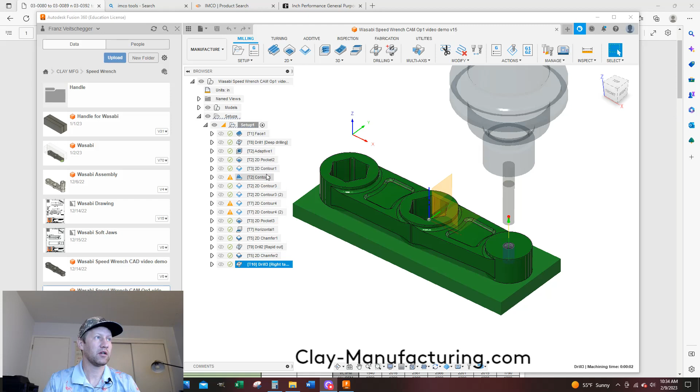I'm going to right click and say edit. When I'm looking at my feeds and speeds with an end mill, I'm looking at the feed per tooth, also the IPT, inch per tooth. So this is about 3.3 thou, a little over 3 thou. So I'm paying close attention to that.

I want to show you something else. I'm going to come to my select, and I have my Clay mini mill aluminum. If we do my T... did I say T3? It's my T2 on here, so it's my T2, it's my 3/8. When I click on it, I have a product link right here, and I'm just going to click on here and follow that link.

No, I don't work for Haas. This is just the tooling I'm using. So this brings me to the exact end mill that I'm using, and Haas has really good speeds and feeds charts. So I'm going to click right here.

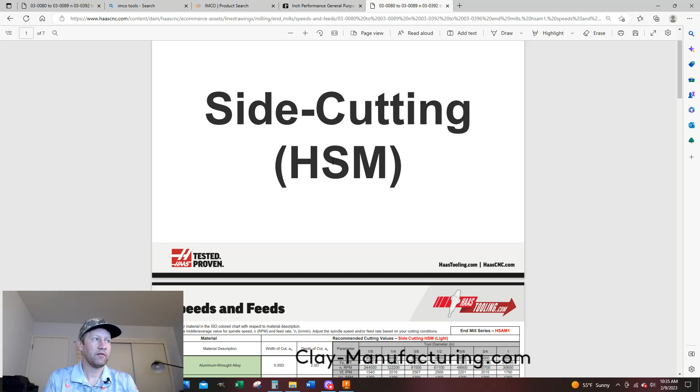This side cutting HSM is kind of a newer strategy where it's small step overs, really fast linear feed rate, and relatively long depth of cut. So let's break it down.

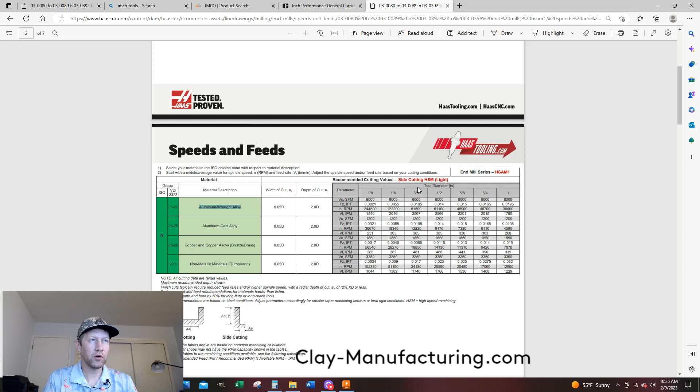We're going to pretend we're using aluminum wrought alloy, and we're using our 3/8 end mill. Let me zoom in a little bit. So the inch per tooth, that feed per tooth, that's what I'm looking at right here, and this is relatively high. Again, this is a small width of cut or step over, or optimal load as Fusion calls it, with a really high feed rate.

Haas also puts in a recommended RPM. So if you're using an SFM, your surface feet, the machinability of the material, of 8,000, it's saying your inch per tooth can be 10 thou, but your RPM needs to be 81,000. I don't know about you, but I don't have an 81K spindle. So when a situation like this arises, you max out your RPM.

So on mine it's 6K, so I'd max out my RPM, and then I'd try to adjust my linear feed rate to accomplish this 10.5 thou inch per tooth. Now there's some things we need to really pay attention to. We have to pay attention to our width of cut. And if you go down here, there's a little diagram.

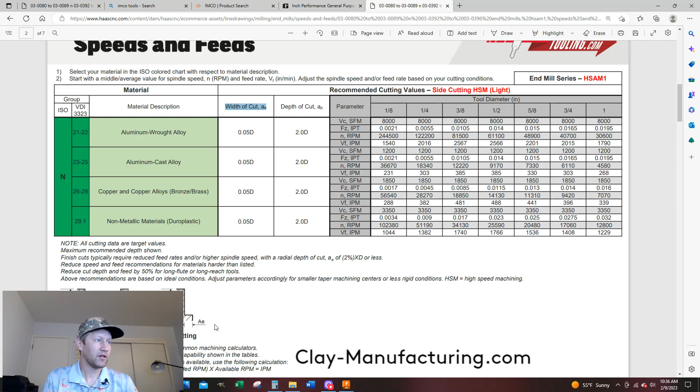So side cutting, this is the AE, and it gives you a little conversion, or a little formula. So if you're using these feeds and speeds, this side cutting HSM, you need to use these parameters. So let's pop out my calculator. I did some math.

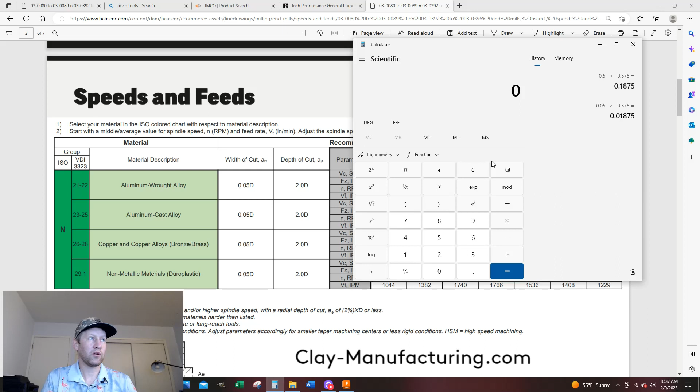If we're doing a 3/8 end mill, we're going to do 0.05 times the diameter for their recommended width of cut. So this is 0.05 times 0.375, enter. So that's a small step over. So the max step over, if you're using the feed and everything that pertains to this, is about 19 thou of your step over.

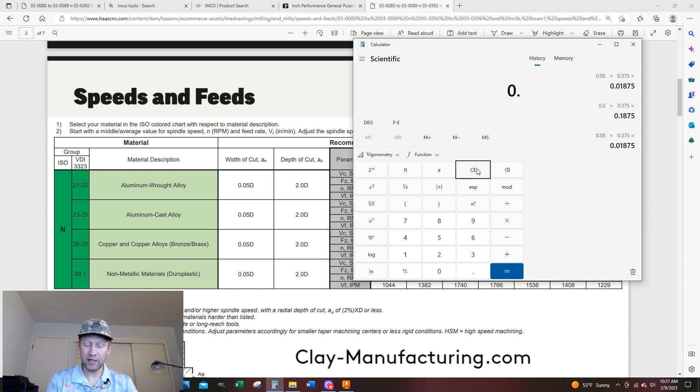And you do not want to exceed a depth of cut. So that's your AP. If you look on the lower left right there, you don't want to go more than 2 times the diameter. So if I clear this out, my diameter again is 0.375 times 2. So it means with these feeds and speeds, the maximum depth of cut I can do is 3/4 of an inch. So that's a pretty good step down.

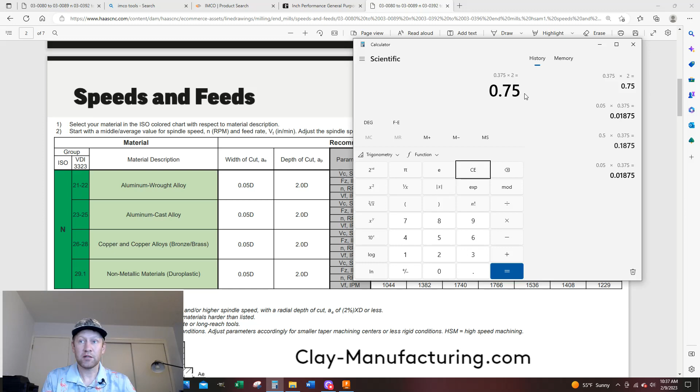That's the max. Now, on this one, this is incredibly fast, and I found on my mini mill that it doesn't work that well for me. I'm not willing to run my machine fast enough. Also, this strategy, you have to do tons and tons of step overs to machine something. So I've actually been increasing my width of cut a little bit on my machine.

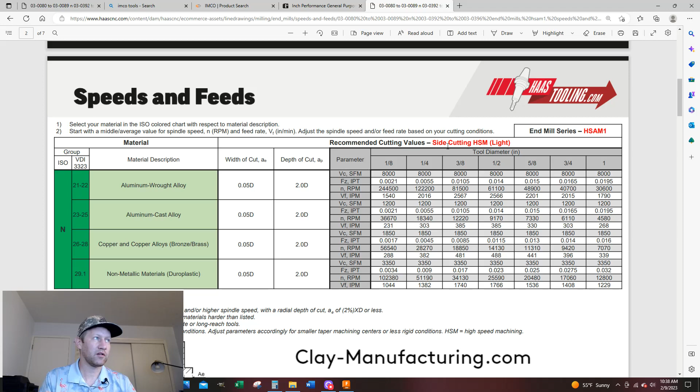And then before I hop on over to another website where I go to Guhring a lot. Guhring is a good website for feeds and speeds as well. But let's cruise down this one. So on these speeds and feeds, we have a more traditional side cutting.

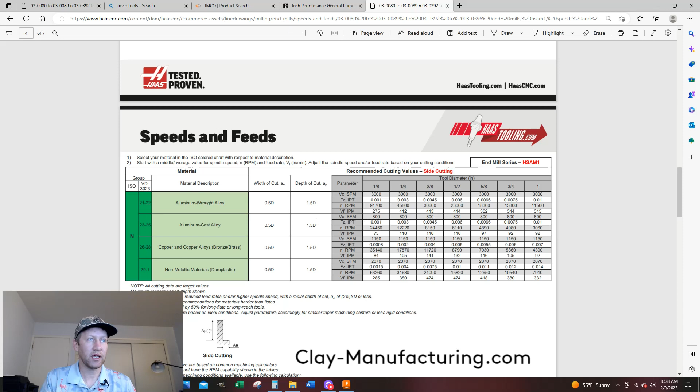And so here, if I'm looking at the same tool diameter, the 3/8, you see how the chip load is drastically reduced. It's 4.5 thou. So on the other one, it was 0.010. This is 0.0045. And that is because if you look at the width of cut, the width of cut has increased a lot.

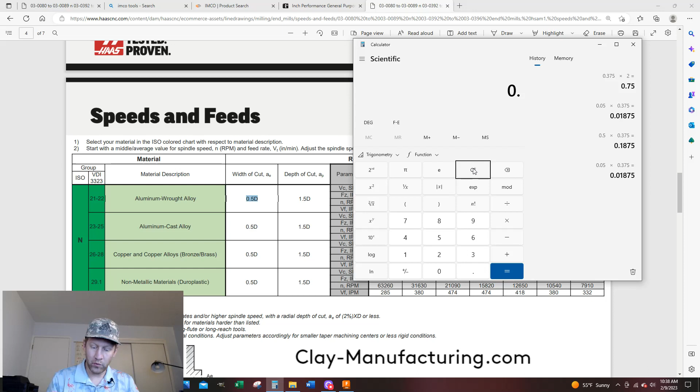So it's 0.5 times 0.375, that's the cutting tool diameter, and I'm going to say enter. So the width of cut is 0.1875. So that's how much it steps over in between steps. So you have a lot more engagement on the side of the tool.

And if you notice, the depth of cut maximum decreases as well. So that's 1.5 times 0.375, enter. So the max with these settings, with this chip load, is a little more than 1/2 of an inch, where that other one was 3/4.

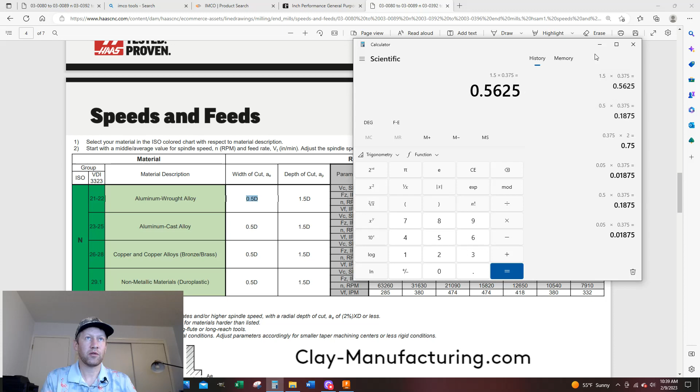And let's see, and then you see right here, it's still saying the RPM is 30K, which most of us don't have a 30K spindle. So on mine, I would max it out at 6,000 and start adjusting my linear feed rate to get here. However, my machine's not that rigid compared to like a bigger 8,000 plus pound machine. My machine's about 4,000 pounds. It's like just barely an industrial grade machine. And in fact, most people just laugh that it's a Haas, but for the money, it's awesome.

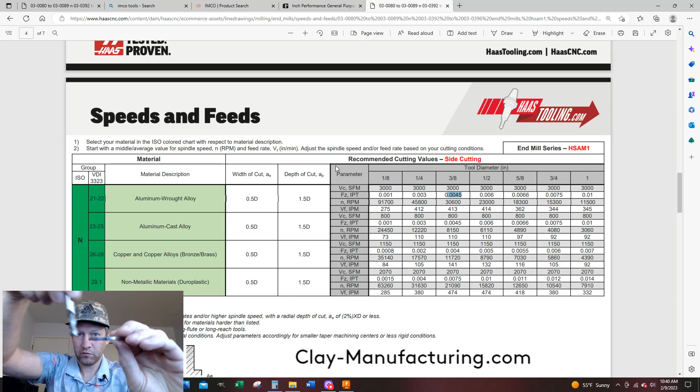So where do I go from here? So this is for side cutting. When you're using the end mill and you're cutting on the side, let's see, when you're cutting on the side of a part like so.

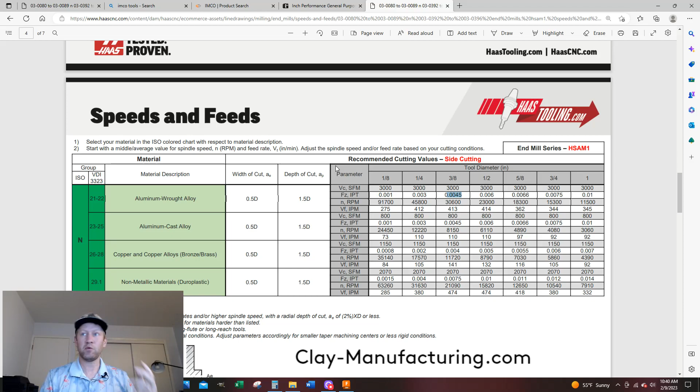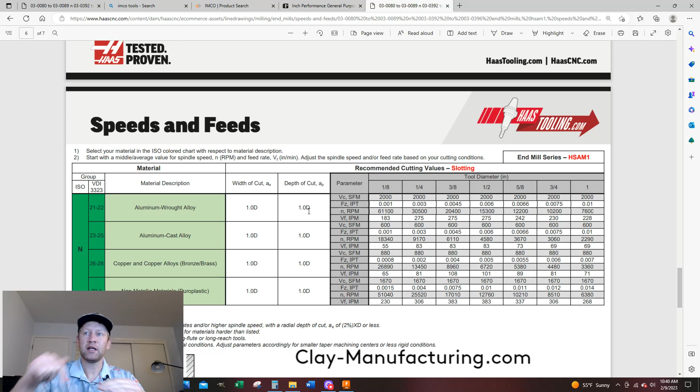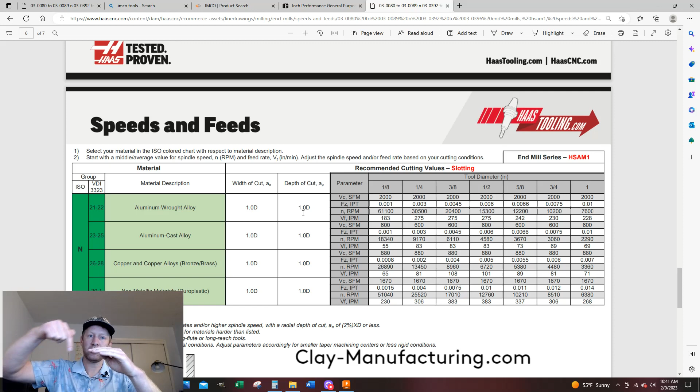And then the maximum depth you want to do, recommended, is between each pass, 1 times the diameter. So in this case, it'd be 1 times 0.375, so that's 0.375. If you were doing a slot deeper than that, you'd have to go 0.375 deep and then continue until you get to your nominal value.

And then let's go over to Guhring. So this is Guhring's website. I really love their feeds and speeds, I probably use this one the most. And when I'm doing feeds and speeds, I'm bouncing between websites kind of seeing, because you're going to have to machine, you're going to have to start somewhere.

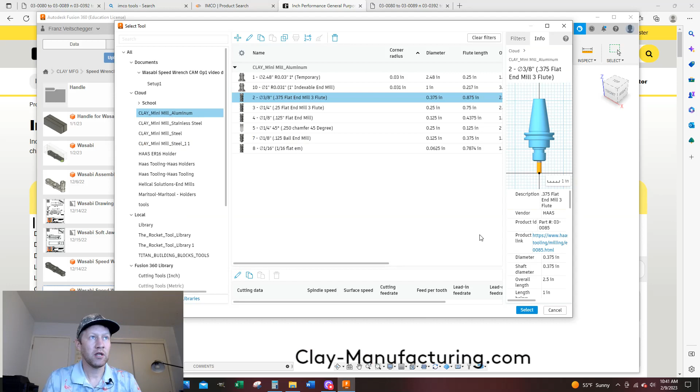Let's see, Fusion, I'm going to say cancel. A lot of times, if you're starting with your feed per tooth about 1 thou, that's really low. You probably don't want to go much lower than that, but it's really safe for a lot of machines.

And in aluminum, most of the time, when you're side cutting, not drilling, side cutting with like an end mill, I'll max out my RPM and then just adjust my linear feed rate here to get my feed per tooth. So they affect each other. And so I'll do it right now.

So if I drop this down, if I go cutting feed rate, let's go to 10 inches a minute, you see how it drastically reduces it. Now it's a half thou, and if I increase this to 100 inches a minute, you see now it's at 5 thou, and if I decrease my RPM, it's going to load that tool up more.

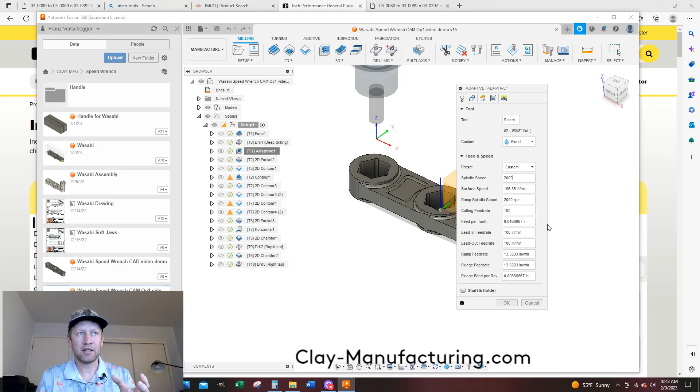So if I go from 6,000 RPM to 2,000 RPM, look at that, now I'm really loading it up. So it's generally safer in aluminum to have a higher RPM versus, you typically max out, you have a high RPM, so that way if your feed's not spot on, you're not loading the tool or the machine up as much, or if you get your offsets wrong.

I usually see people when they're using a wobbler, they get their offset wrong by 100. They either add or subtract 100 thou in the wrong direction or forget altogether. So they're plowing that tool through material, and that's where I see a lot of problems. So when you have that RPM up and it's taking a bigger cut than you think, it's safer on the machine versus if you had a lower RPM.

And that's aluminum, you get away with murder in aluminum. It's like glorified wood. So when you're doing your steels or harder material, you need to be pretty spot on with your feeds and speeds.

Now I'm back on the Guhring website. We're still talking about how I find my feeds and speeds. Guhring's awesome, it breaks it down, it really simplifies it. It doesn't just show me the color, it gives me a description of the item.

So I want aluminum, and then we'll kind of work our way to my tool that I have. I want my diameter in fractions, so I'm going to click on here. And this tool we're doing is 3/8. So yeah, I'm going to go update results.

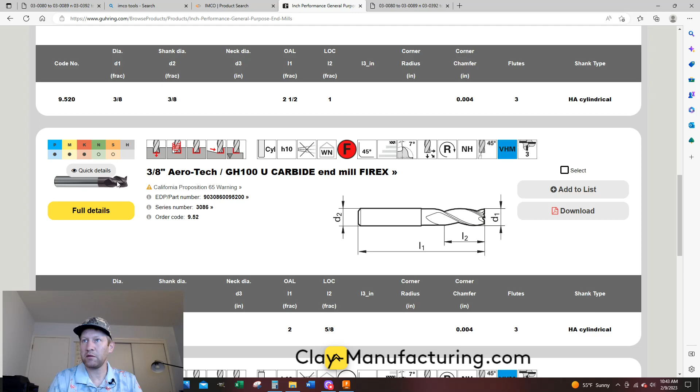And let's see, so this, I know mine's, see, these have a coating on them. The one in my example does not. So we're right here, 3/8.

This, my flute length right here, this is l2. It's saying 1 inch. So if I look down, this is my length of cut or flute length, that's 1 inch. And my overall length right here, I think that's an l1, yeah, that's the overall length, 2.5 inches. And my shank diameter, all right, everything looks good.

And this is a 3 flute. So that's really close to the tool. It's a carbide tool, so it's really close. So we're just going to look at it.

We're going to go to full details, and we're going to do some compare and contrast. And I'm going to come, and then it shows you everything this end mill's capable of, and this is the same as the one I just showed you in my hand.

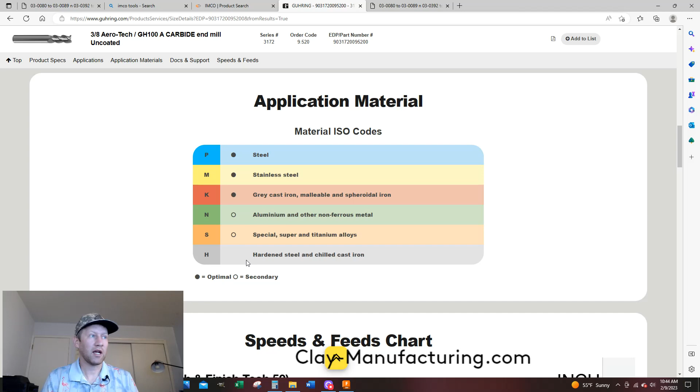And right here, this shows you, so these colors and letters represent what material it is, and these show you what it's kind of designed for, and then these secondary ones are, okay, it's not specifically designed for this, but it can do it pretty good. And then this is not even selected because it is not meant for hardened steel or apparently chilled cast iron in this one. And I love these, this just simplifies it so well for me.

These are all good formulas. I have this written down in your notebook, RPM, so you can kind of look up the SFM, the machinability of a material, and kind of get an idea of RPM. It becomes a lot more important, like I said, with steels and hard materials. And look at this chart.

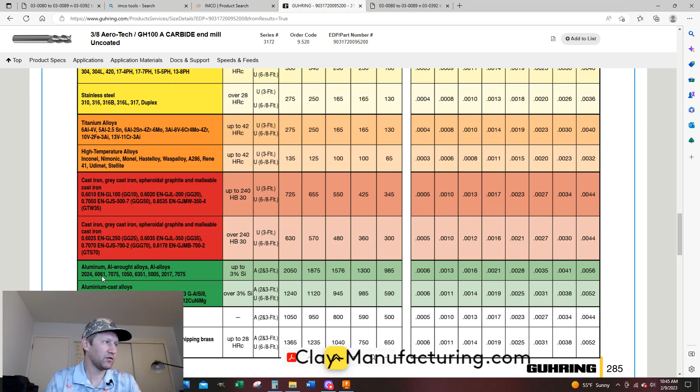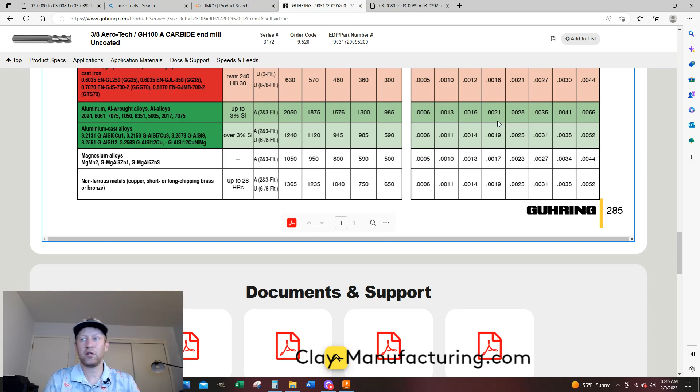So this is if I'm looking up for steels, but right here, this is my 3/8 tool, so this is my diameter, and let's go on down. So this goes, okay, 6061, I'm right here on the lower left. I'm going to come over to this column. Let's scroll up. So 3/8, it's saying in 6061, the baseline chip load is 2 thou.

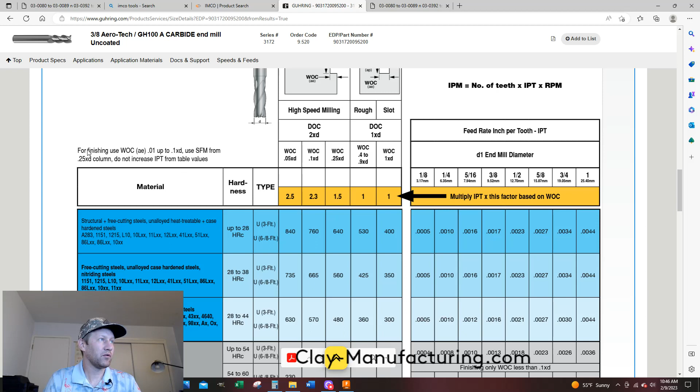Now check out what they do. So they have, if you're doing high-speed machining, so that's like the HSM strategy we just looked at on the Haas. So we've got a whole different set of little categories over here, and they even break it down even more. So if you read over here, this will tell you like finishing and stuff, and verify everything I'm saying.

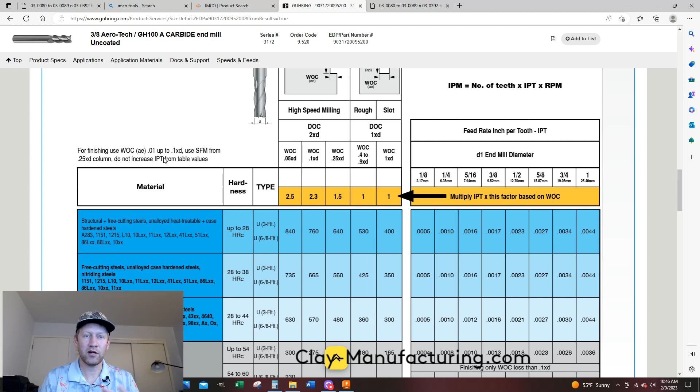Like sometimes I look at my videos, I'm like, that was verbal diarrhea. I said the wrong thing. I didn't mean it, because sometimes my brain and mouth are not in sync. But verify what I'm saying.

This says for finishing, use width of cut 0.01 to 0.1. So these ones would be kind of your finishing strategies. So if we're looking at this, this shows my depth of cut and width of cut. So if I'm using this HSM, this would be like a finishing strategy. I usually use this 10%. So this is width of cut. And for this one, it's saying if I'm using this strategy right here, this is width of cut.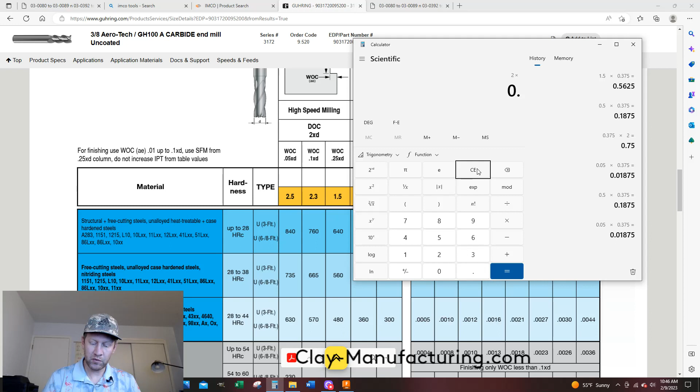This says my depth of cut can be no greater than 2 times the diameter of my tool. So let's just knock that one out of the park. So 2 times 0.375. So that means my step down is not more than 3/4 of an inch. And if I'm using this step over 0.1 times diameter, it means my step over, 0.1 times 0.375, enter, is no greater than 0.0375.

So on my Haas mini mill, I usually use 10% of the cutter diameter as a rule of thumb. It's a pretty safe one. And then check this out though. So what's cool is, now here's a multiplication factor. If you're using this step over, you can multiply this chip load that we have down here, this 2 thou, you can multiply that chip load by this number.

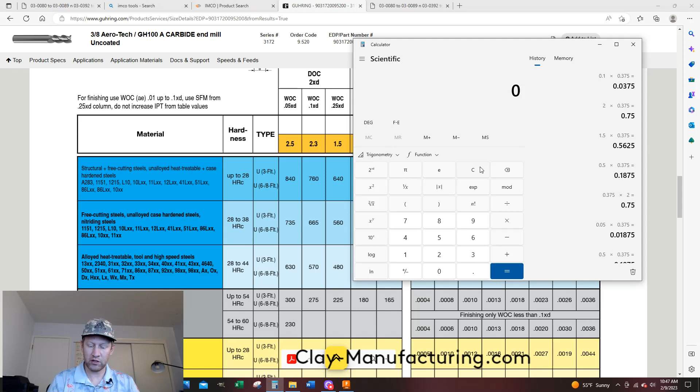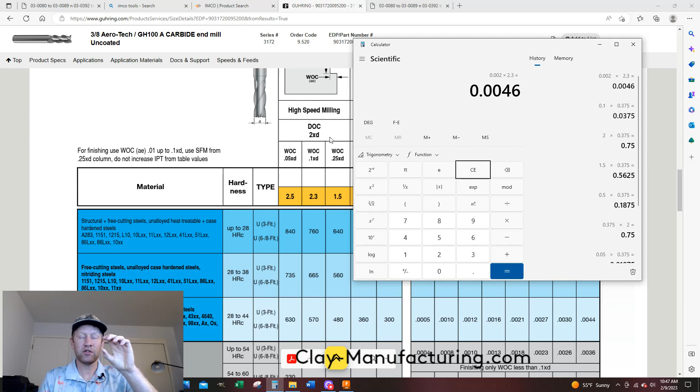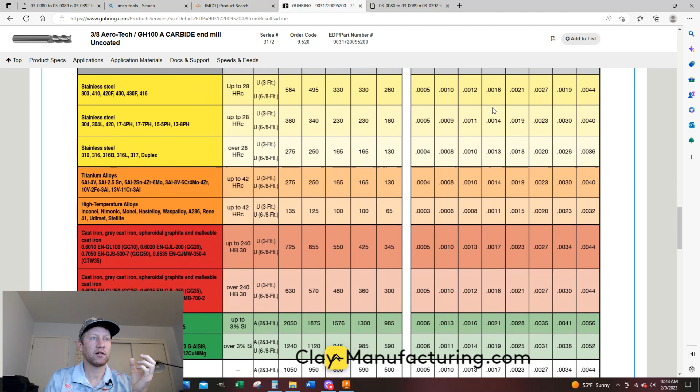So roughly, it was about 2 thou, a little more, let's say 0.002 times 2.3. And it's saying I can get away with about 4.5 thou if I'm no greater than 3/4 of an inch and my step over is no more than 0.0375. So I like this one a lot. And then let's see, RPM. If you're doing that, you need to kind of, because this doesn't tell you your RPM. So if you're using this one I showed you, this is saying your SFM is, I believe, this column.

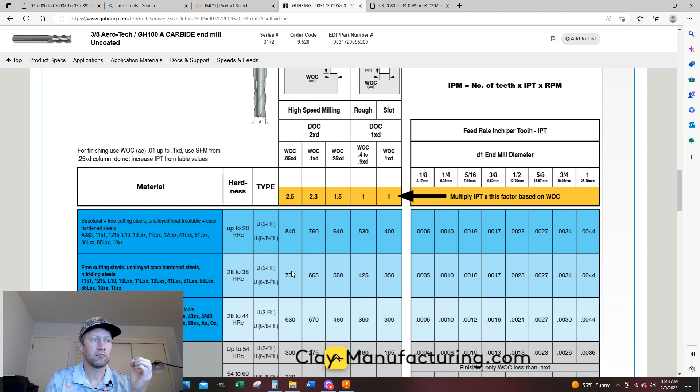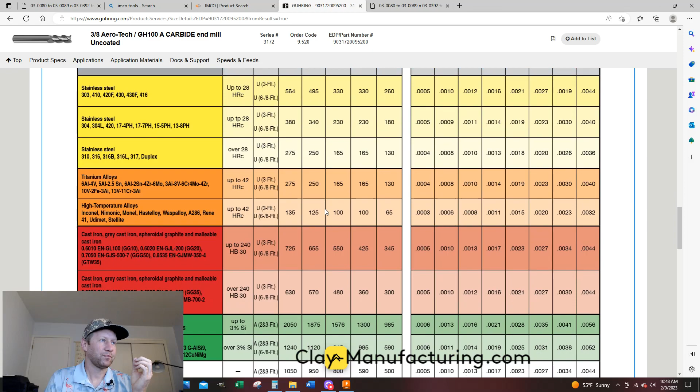Let's look. Nope, you're stupid. Where's my SFM? It's probably right in front of my eyeballs. Oh, it is. I'm sorry. This is the SFM right here. So it's showing, okay, that makes sense. Sorry. So this is 2050.

And let's do our formula. So to find my RPM, I'm going to go like this. I'm going to go, what was it, 2050? I think it's 2050. If not, I'm close. 2050, divide by the diameter, 0.375, enter. And then I'm going to say times 3.82, enter. So RPM of 20,000, 21,000.

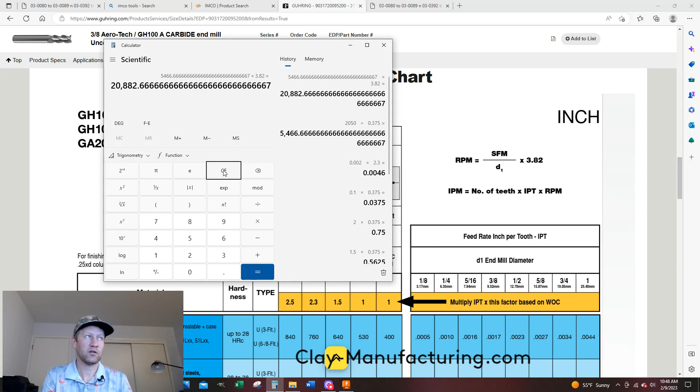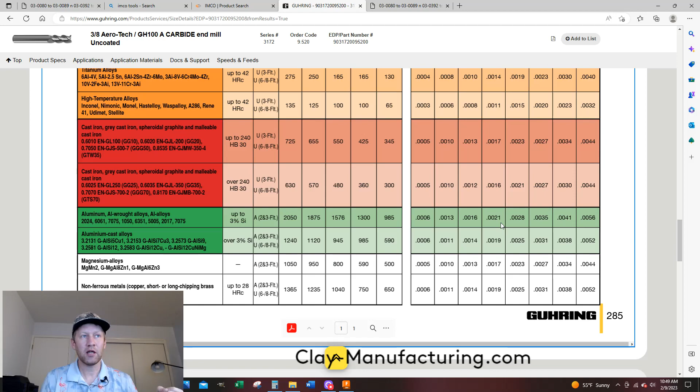I don't have that. So what I'm going to do is max out my RPM and then adjust my linear feed rate to get to the chip load that we calculated based on 2 thou multiplied by this multiplication factor.

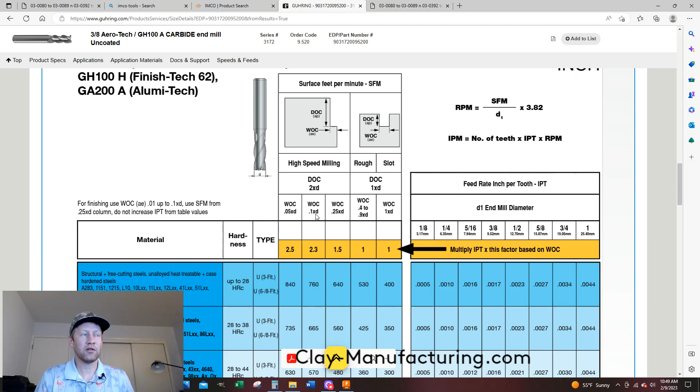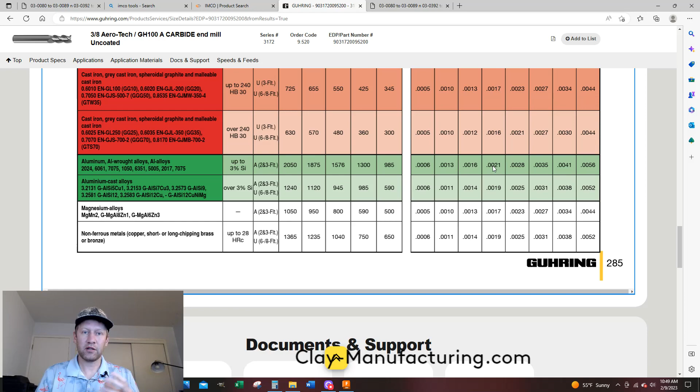And since I'm on a Haas mini mill, I'll do this 10% for the width of cut. I'll do 0.1 times the diameter, and I won't do this multiplication factor. I'll just use this as a baseline down here, this 2 thou chip load. It's really safe. And then if you're getting chatter, reduce your linear feed rate. If you can run it harder, if everything's looking good and smooth, you can try increasing your linear feed rate till you find what works for you.

So this is a good website. I'm sure I'm kind of missing a lot of stuff, but dang it, I'm 17 minutes into this.

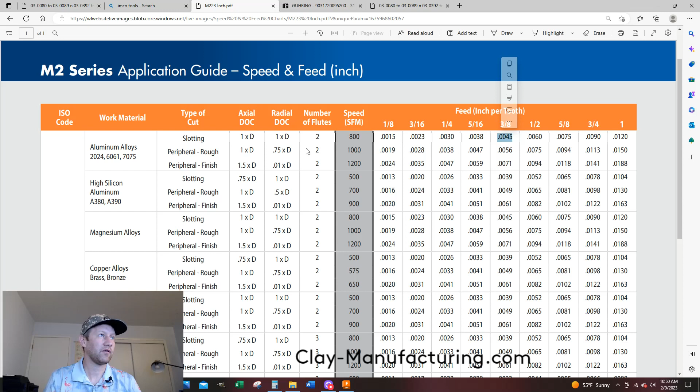And then IMCO, here's another one, IMCO feeds and speeds. I'm just going to click on one. And they have a pretty good speed and feed calculator as well. This has been acting goofy, but you go download PDF. And again here, these have really good feed and speed charts. Here's like a 3/8 recommending 4.5 thou. And here's if you're doing slotting, if you're roughing around it, or if you're doing a finishing strategy.

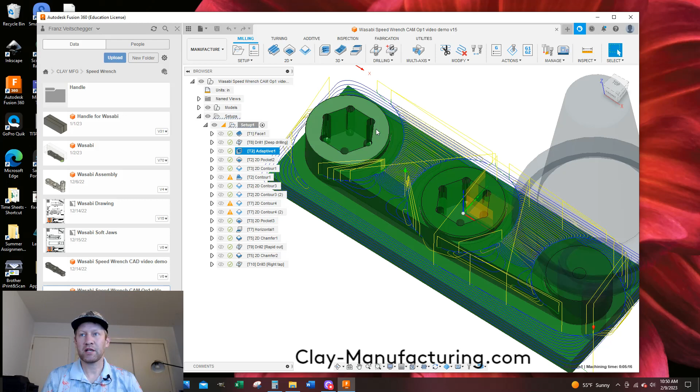And while I'm here, those are usually for when you're coming around the part, like those ones I was showing you for the side cutting and side milling HSM. Once you start getting inside here, you really need to reduce your linear feed rate because the surface speed of the tool is super fast when it's going around these corners. And when tools break, it's usually in the corners because they're loaded up. They're changing direction, they're increasing in engagement, and usually the prior pass didn't remove enough material, so it's super loaded up. And if you're trying to run your super high linear feed rate around the part in here, you're probably going to break a tool or get excessive chatter. So maybe even start using your slotting feed rates in here.

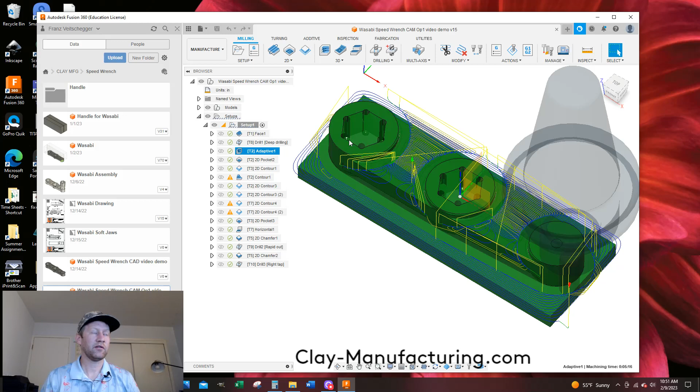And what I'm looking at in these tool paths, so we were talking about calculating your width of cut. If you're doing an adaptive strategy, that is your optimal load. So we're looking at that optimal load. It's 0.0375. So that's what I've been using on my curriculum stuff. Sometimes if I'm unsure, I'll use that first Haas one I showed you where I do 0.05 times the diameter, so it's a really small step over.

So let's go over what really affects how your spindle is loaded up, how your tool is loaded up, how aggressive you're being. This optimal load can also be called your step over or your width of cut. This is extremely important. So always make sure you have your optimal load set to what I showed you in those charts. And then on your tool, cutting RPM, super important. Your cutting feed rate, super important. And your RPM and feed rate are affecting your feed per tooth. And in those charts, the feed per tooth is kind of my money. That's what I'm paying very close attention to.

So I'm figuring out what feed I need, and usually maybe start in the 1 thou range and start working your way up when you're feeling confident with your setup. Because the ones they provide you are also baselines for more typical industrial big rigid machines. So if you got some big badass Mazak or something, a real rigid machine, you can probably far exceed what they're showing you. And that's about it.

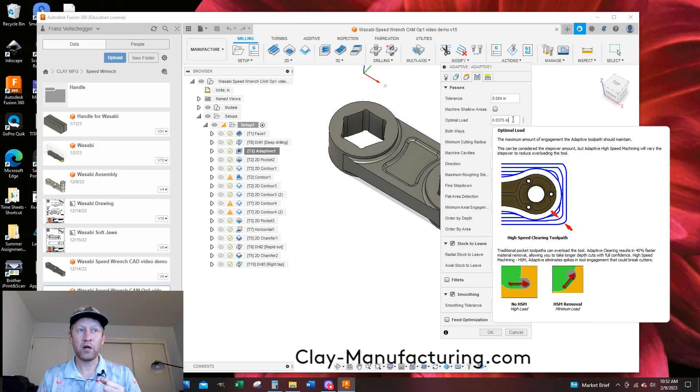This has gone way too long. I hope this helps, but it is very in-depth. This is just to get you started and to show you where I get started. I look at the feed per tooth, also known as the inch per tooth. I look at the step over right here, this optimal load or step over or width of cut, and my linear feed rates. These ramp feed rates, usually the Fusion defaults are pretty darn good where I don't go wild with them. And once I get comfortable with a program, then I'll start increasing those up until it works for my machine. These are incredibly slow, but they're also incredibly safe. I haven't had a problem with their ramp or plunge feed rates at this point.